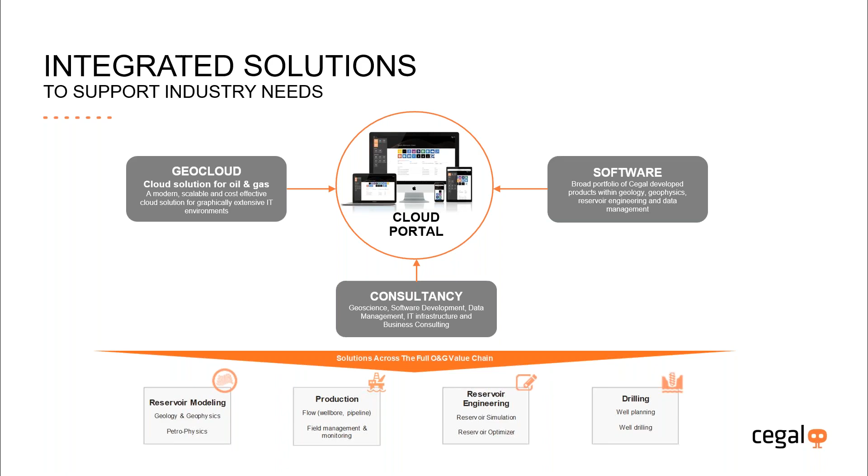And now we're going to have a closer look at one of those plugins, the Unconventional Toolbox for Petrel. This toolbox is the newest addition to our toolbox suite. It was released September last year, and as with our classical toolboxes, the tools in this Unconventional Toolbox are based on client requests. It has small to medium-sized tools that will enhance your existing Petrel workflows. The main focus of this toolbox is to provide improved ergonomics when working with lots of wells.

The Unconventional Toolbox has 10 tools. The Well Data Viewer here is by far the most significant tool in this toolbox, and that is also the tool that I will be demonstrating live in a few minutes. And now I'll give a short one-slide introduction to all of these tools in this list before we move on to the live demo.

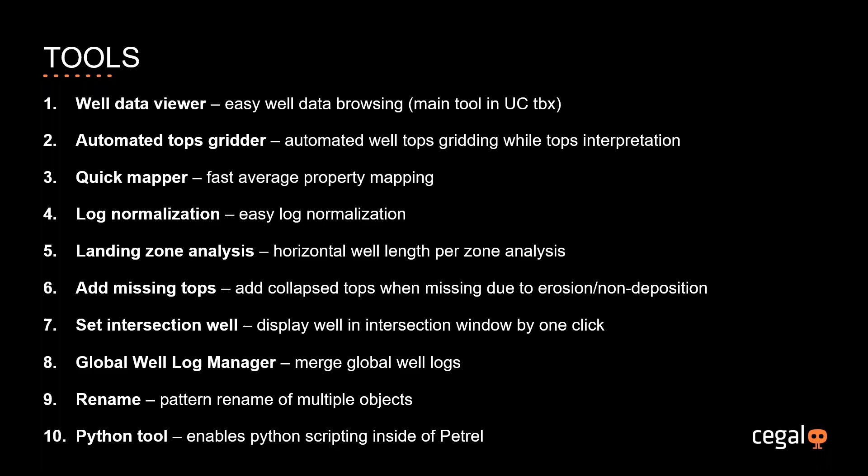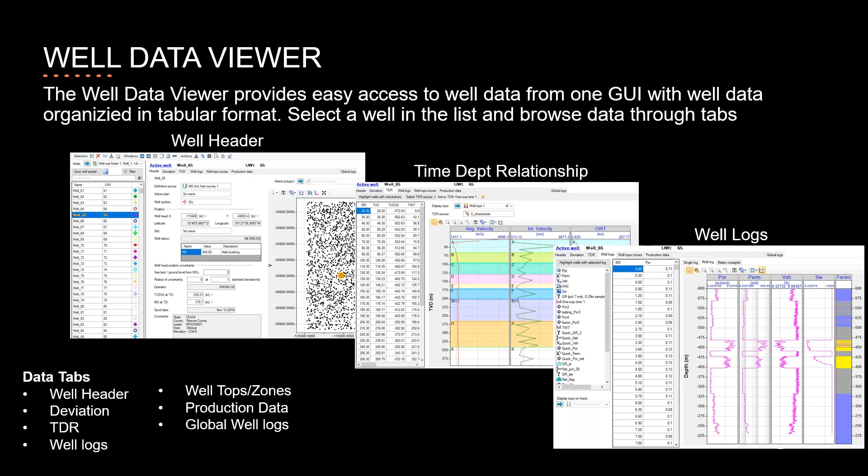The Well Data Viewer is a tool that gives you access to well data from one common user interface. The well data is organized in data tabs in this user interface, and the tabs we have in this first version are well data, well header data, deviation data, time depth relationship data, well log, well tops, production data, and global well logs. And in future releases, you will be seeing additional data tabs in this user interface. This tool is useful in any situation where you have many wells, that being conventional or unconventional.

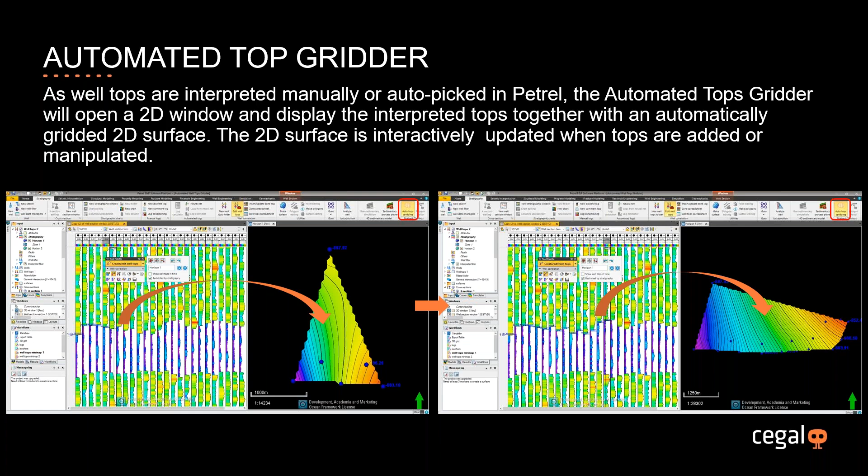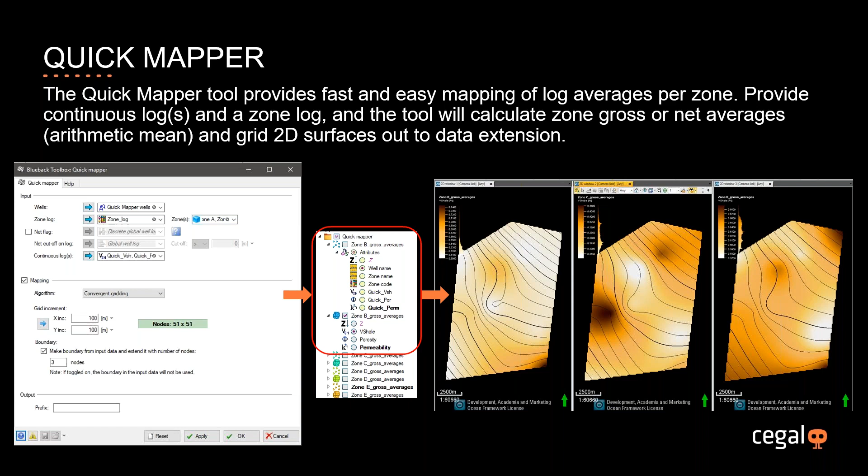The Automated Tops Gridder is a tool that interactively grids a 2D surface of well tops as you pick the well tops in the well section window, providing instant QC and structural information about the horizon that you're picking. The Quick Mapper is a tool that quickly calculates log averages per zone and populates those averages out in 2D maps, providing fast lateral trend screening of properties.

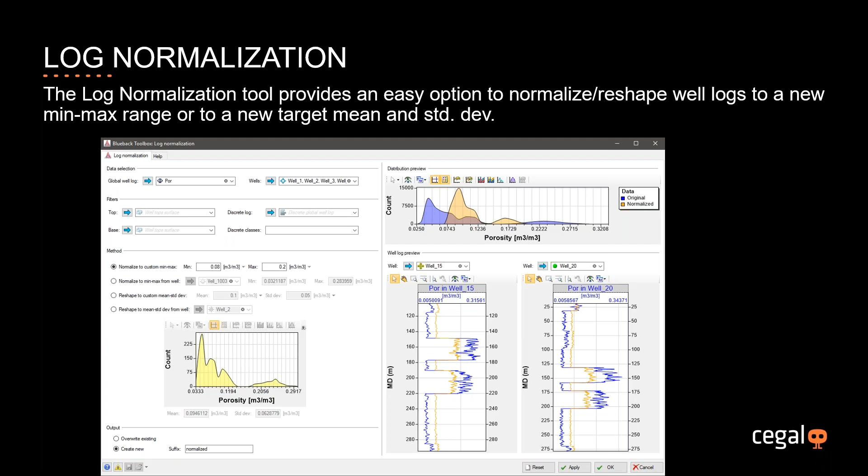The log normalization is a tool that enables easy normalization of well logs, either with custom min and max ranges or ranges defined by known well input. The tool has various before and after QC plots. With the landing zone analysis tool, you can do analysis of zone penetration length per well per operator, and you can go in and see how well you or your competitors are at drilling horizontal wells in the target zone.

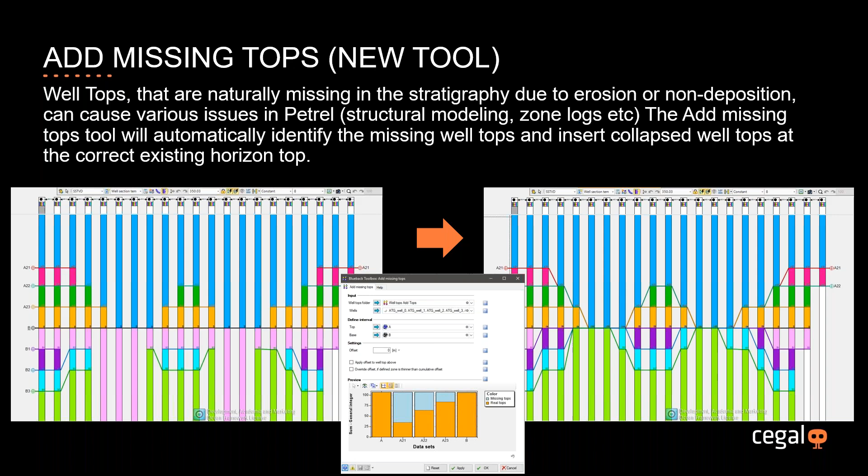When you have geology with erosion or non-deposition, you will have wells in Petrel where certain well tops are missing in the stratigraphic column. In Petrel, it is useful to have those missing tops present as collapsed tops, and the Add Missing Tops tool automatically adds these missing tops as collapsed tops.

Set Intersection Well is a small tool that enables you to select the well for display in an intersection window by simply clicking on the specific well in a Petrel 2D or 3D window.

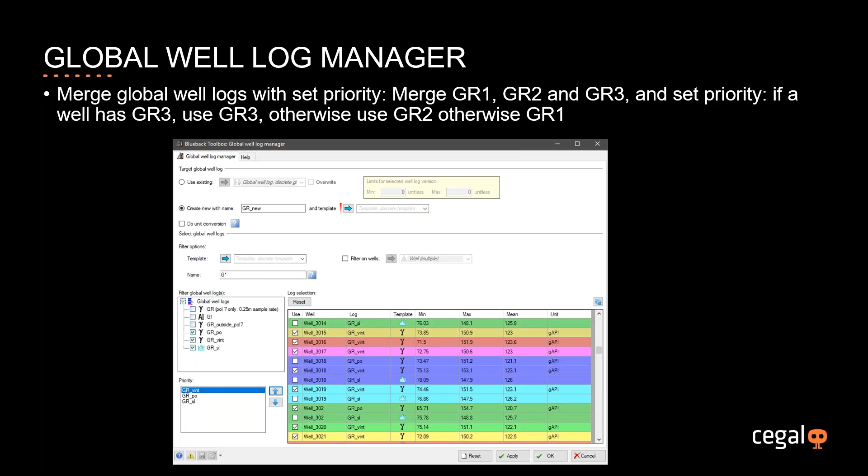The Global Well Log Manager enables you to merge a set of Petrel global well logs into a new common global well log. This tool works across Petrel templates and will generate a new global well log object in the input window.

The Rename tool enables automatic renaming of several objects in Petrel at the same time. It also has name pattern recognition and easy renaming of these name patterns.

And finally, all our toolboxes come with a Python tool that allows you to run advanced Python scripting inside of Petrel.

And now it is time for a demo of the well data viewer. So I will go to Petrel.

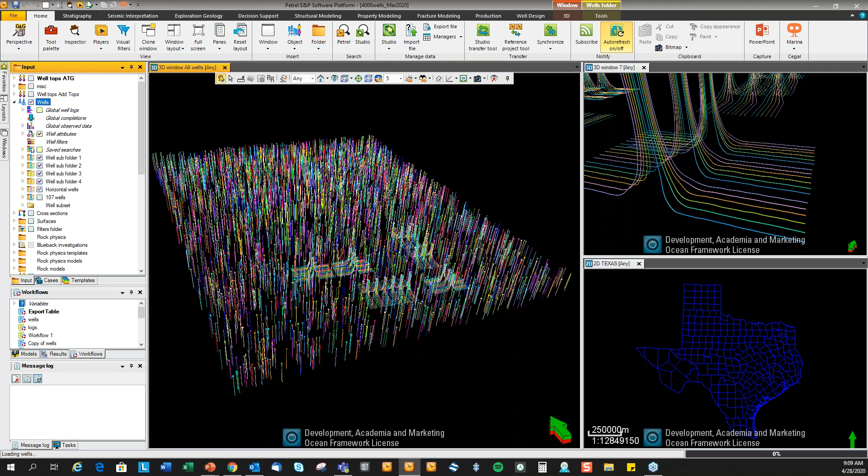Here you see a project with more than 4,000 wells. To open the well data viewer, I go to the wells folder in Petrel, right click and scroll all the way down and click well data viewer. And now the well data viewer is opening for all the more than 4,000 wells in this project.

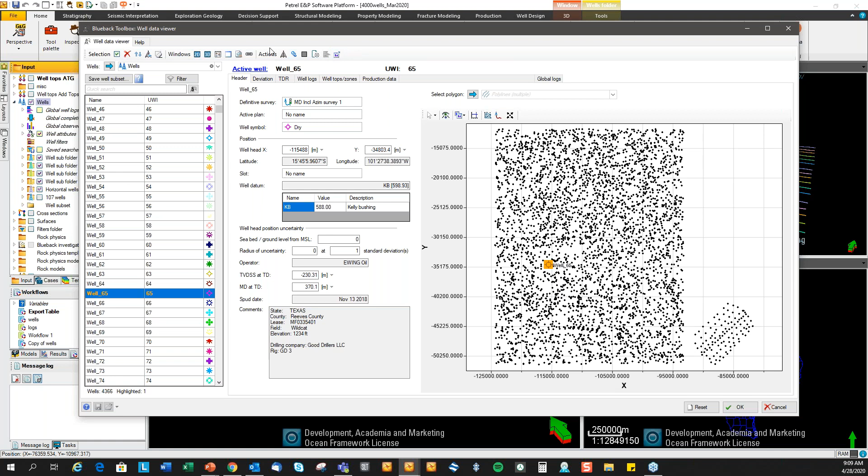So here you see the user interface of the well data viewer. Just make it a little bigger, so just all the main items. We have the well list with all the wells in the project, we have the active well label, so we can go in and activate wells, and we're looking at data for that active well. We've got the different data tabs, and for each data tab we have a data viewing area like this, and here on top we have a toolbar with various tools that helps us with well data.

Okay, so let's go over the individual elements. So the well list, as I said, you have in this case all the wells in the project. At the bottom here you have a little summary. We have 4,366 wells in this project.

One of them is highlighted. We have several highlighting mechanisms where you can highlight wells manually like this. Let's see, now we have 8 wells highlighted, and in some of the different tabs we have some automated highlighting mechanisms based on well data content.

You see we have columns: well name, UWI, symbol, and color, and we can sort on all those 4 parameters in the well list.

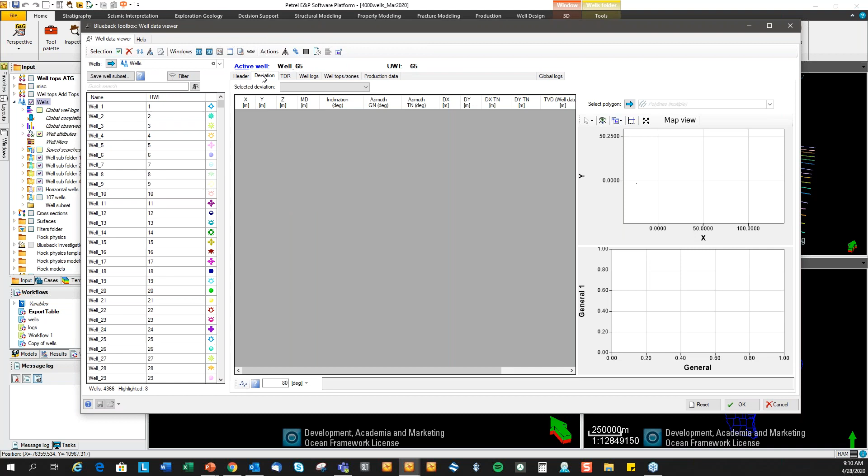The data tabs. So you see that for the active well, we have very easy access to the different data types and the different data tabs for the active well. It is very easy to go in, just one click and you have access to that specific data.

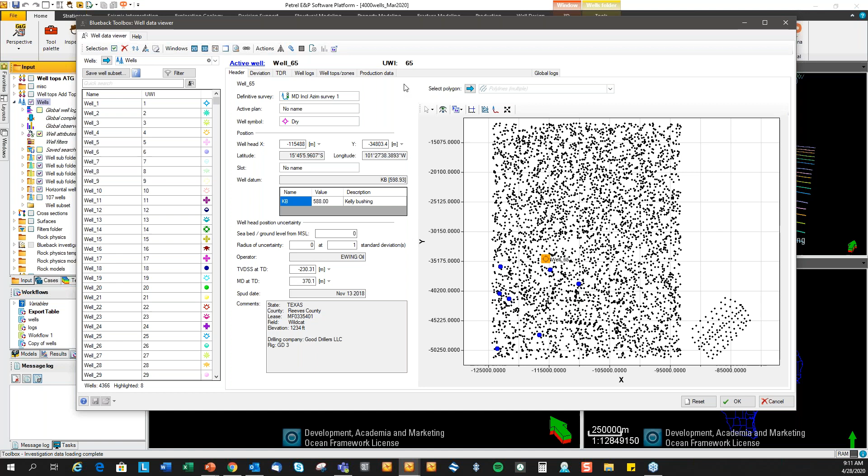So now we'll go over each tab individually. The well header tab, you probably recognize this section here. That is extracted directly from the Petrel well settings, and we have a shortcut to the settings for the active well. So the active well in this case is well 65. I can open up the Petrel settings for this active well by this shortcut, and you recognize exactly this piece of information that we've extracted over into the well header data tab.

In addition to that, we've extracted some well attributes. So we have the operator, total depth, spud date, and we've also extracted the comments section of this well.

Over here to the right, we've added a base map with all the locations of all the wells in the well list, and you can see that the active well is highlighted here in orange. So if I just select different active wells, you can see that orange dot moves around. And you probably also saw that when we do highlighting manually here, these highlighted wells in the well list are also highlighted in the map.

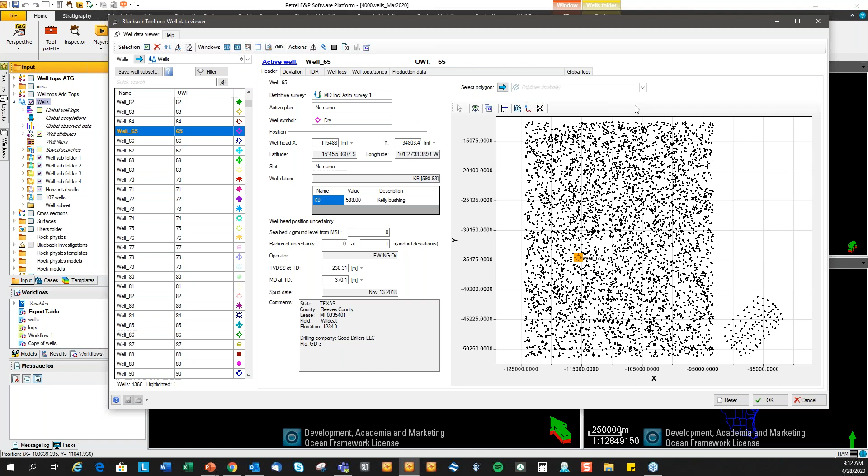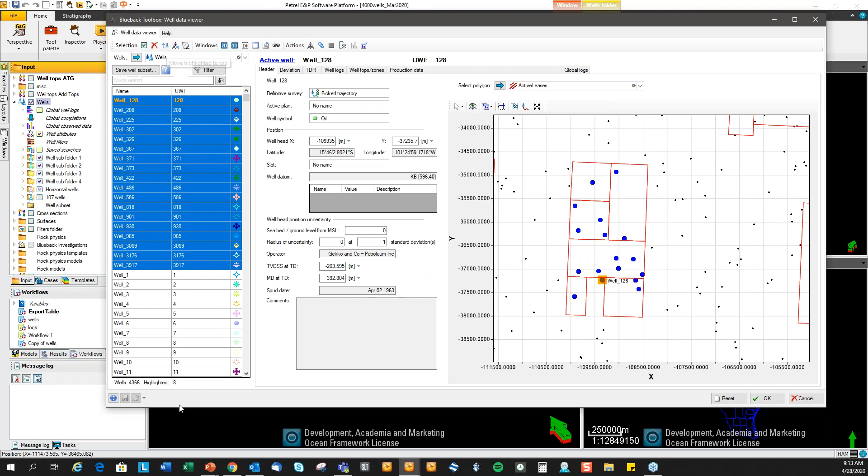We can also go the other way, from the map to the well list. So let me display some polygons, active leases, zoom in on an active lease here. And I want to know what wells I have in this lease, in this polygon. So I use this polygon filter. We have now these wells active, 18 wells are highlighted, and those wells are also highlighted in the well list. So you see they're distributed all over the well list. So I can click this button here that will bring all of those 18 highlighted wells to the top of my list.

So let's just go back to well 65, which is my demo well. The next tab, deviation data. I will, for demo purposes, find a horizontal well.

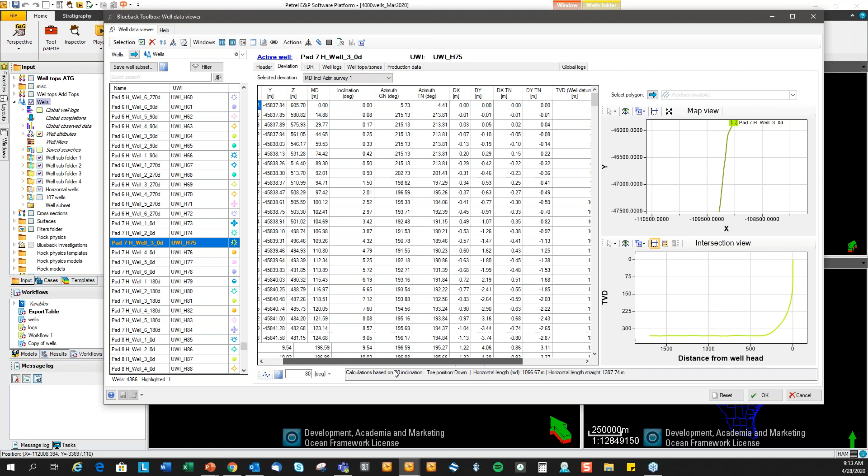Here you go. So in the deviation data tab, we've extracted the deviation survey, so you have easy access to that. In addition, we have a base map of the well trajectory and an intersection window of the trajectory. You can see those.

The trajectories and the surveys update as I flip through these wells. If the well has more than one active survey, you can go in. This one doesn't, maybe this one does. You can go in, you see this one has two different surveys. You can go in and explore those as well.

The tool will display the active deviation as default in this tab. Here at the bottom, if the well has inclination higher than whatever we specify as the heel inclination, the tool will calculate the horizontal length from the heel to the toe. And this heel inclination is editable—you can go in and define that yourself.

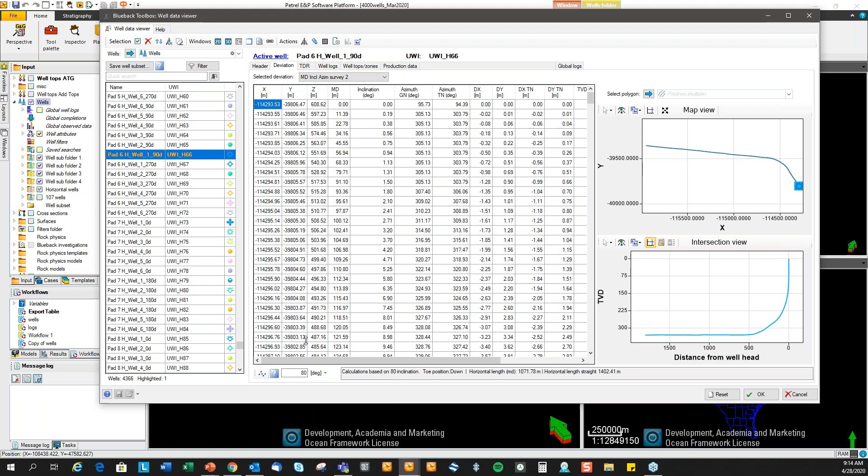Next tab, time depth relationship tab. This well does not have any TDR information, so we can do one thing here: go in and highlight all the wells with check shots. This is one of the automatic highlighting mechanisms.

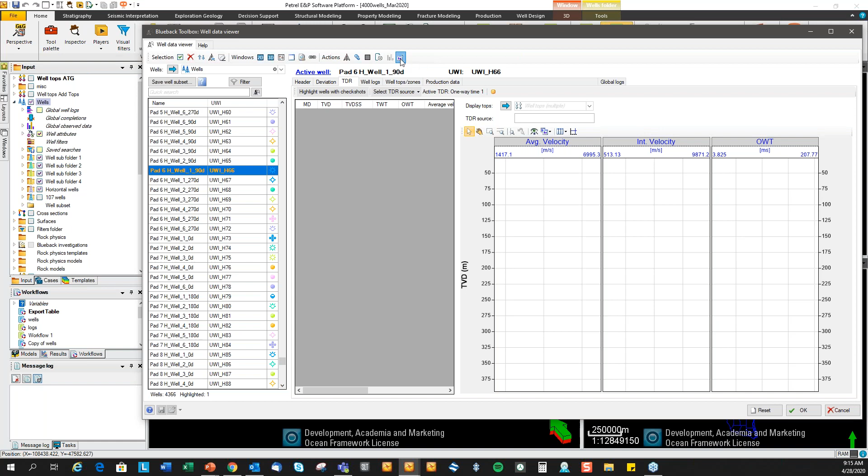And you saw we had the base map sitting in the header tab. This base map is useful in all the tabs, so I can hit this button here that will pop out that base map from the header tab, so we have access to it in the other tab. It's now a floating window.

When I hit this button here, the tool will find all the wells that have check shots and highlight those in my well list. You also see all those wells—those 662 wells that have check shot data—have been highlighted in the base map. So let me just close that base map again.

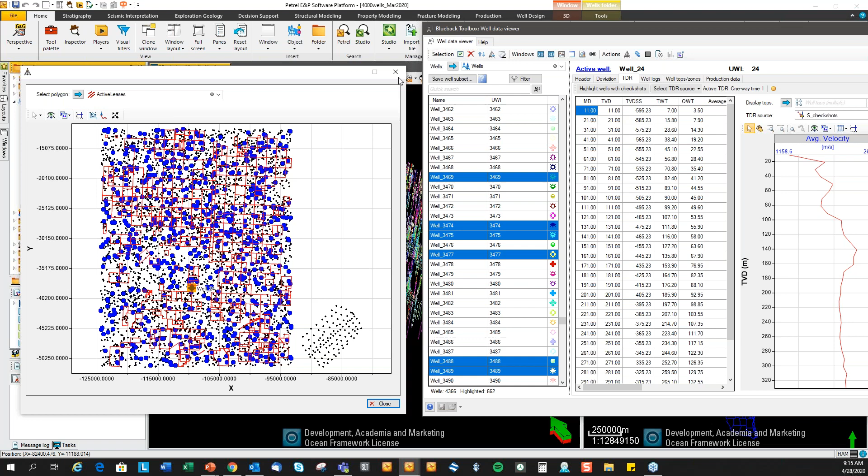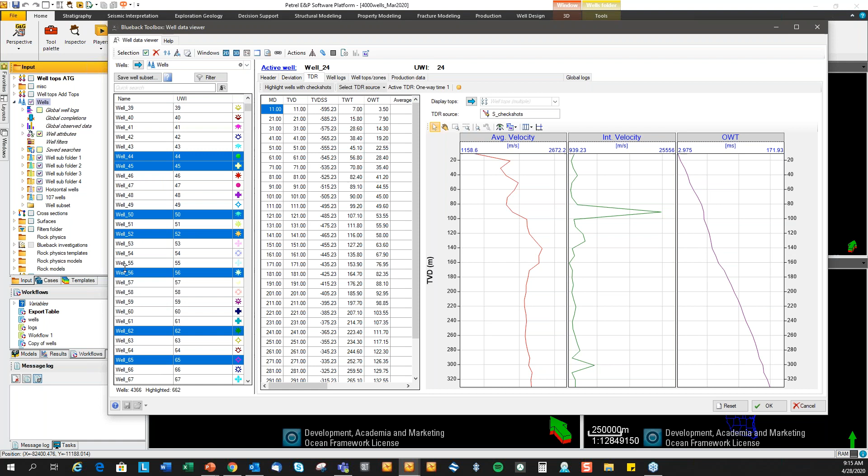So back for demo purposes, I'll go to my well 65. Here we go. So what this tab is doing is identifying the active one-way time log.

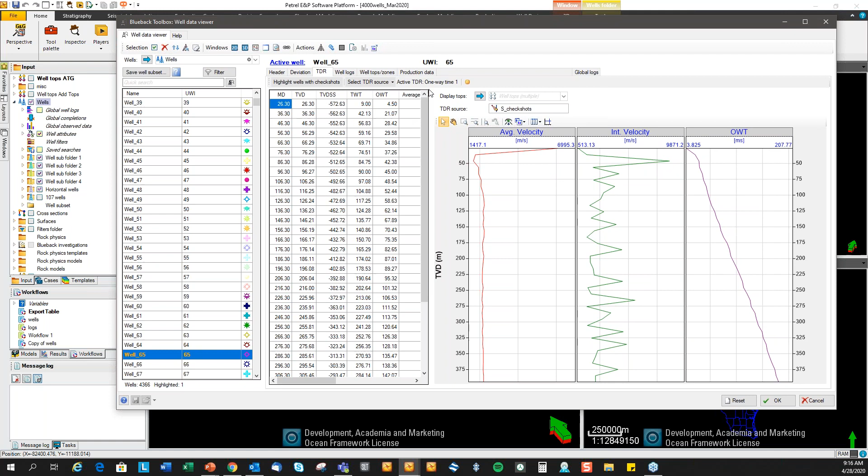That has been generated when you specified the time depth relationship in the Petrel well folders. So when you run that, it generates an active one-way time log that is being used as the time depth relationship. The tool identifies that one-way time log, goes into the history of it, and identifies the time depth relationship source. In this case, for this well, it is a checkshot data set.

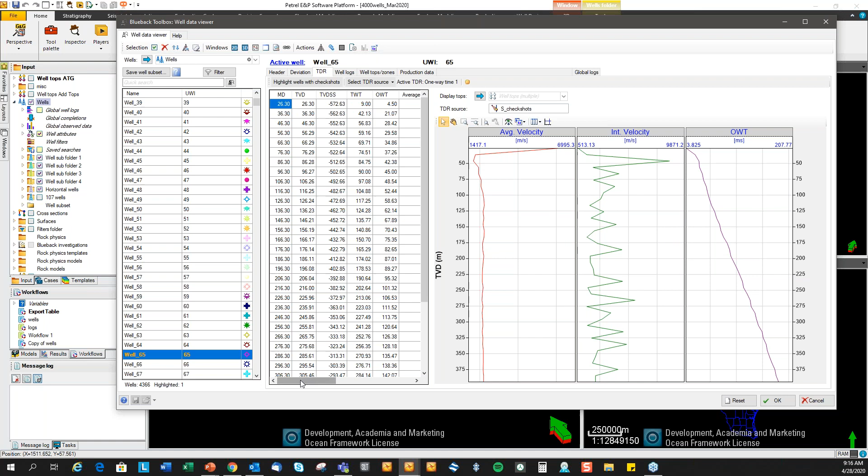So for that TDR source, we extract the checkshot spreadsheet with the depth, the times, and the velocities. And we're giving you the average velocity, interval velocity, and one-way time tracks. We can display well tops on those tracks if we want to, like this.

If the well or any other well has other time depth relationship sources, we can go in and explore those as well. So this well has well tops with associated two-way times. For that, we extract those depths and times, and we actually calculate the average velocity and the interval velocity in the same way as Petrel calculates it for check shots.

And we are able to give you the average velocity, interval velocity, and one-way time traces for this kind of data as well. And the same goes for a two-way time log—we have the times and the depths, and we calculate the velocities for you as well.

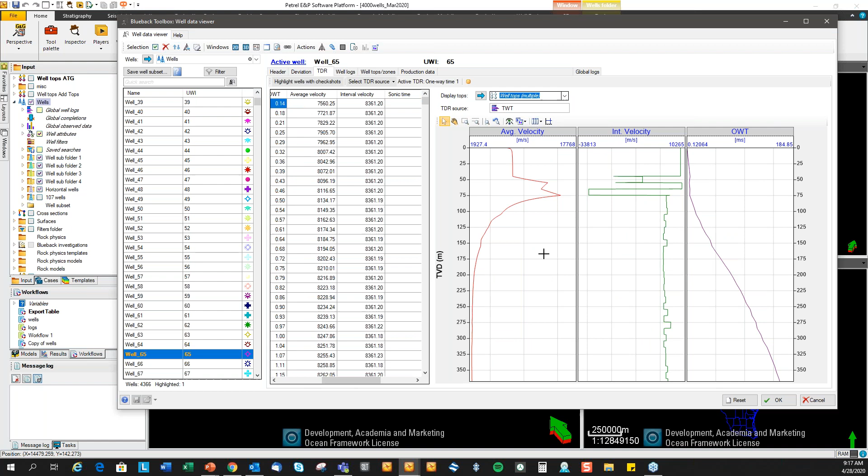Next tab is the well logs tab. In the well logs tab, you see we have three sub tabs: single log, multi-log, and matrix crossplot. In the single log tab, we get a list of all the logs present in this well. We can go in and explore each of these logs, select them, and get the log track displayed over here. We can again display well tops if we want to.

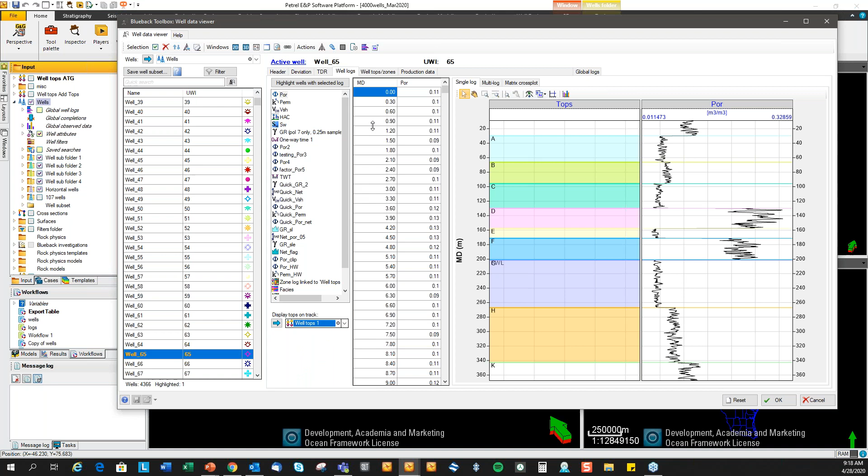And we also get the log spreadsheet with the measure depth and the values, so you can go in and do a quick exploration of these logs.

You can also go in, so for example, for this log quick perm, I want to know all the wells that has this specific log. So we have the selected log. I will highlight wells with the selected log, and that is 401 wells in this project that has this log present.

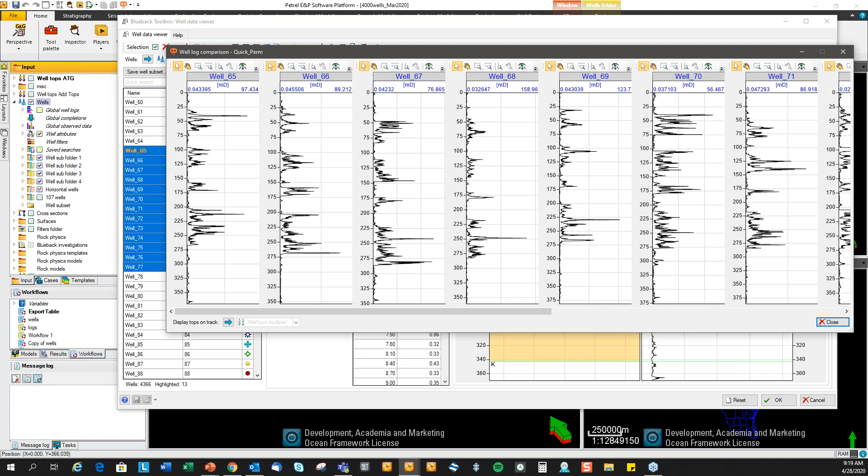When we have this situation, we can also go in and do some simple well-to-well comparison of that selected log. I can highlight a few of the wells that has that log and click this compare wells button. That gives me a simple well log panel with the wells that I selected and highlighted, and the log that I selected. I can go in and do a quick comparison between wells, and I can display well tops on this window as well.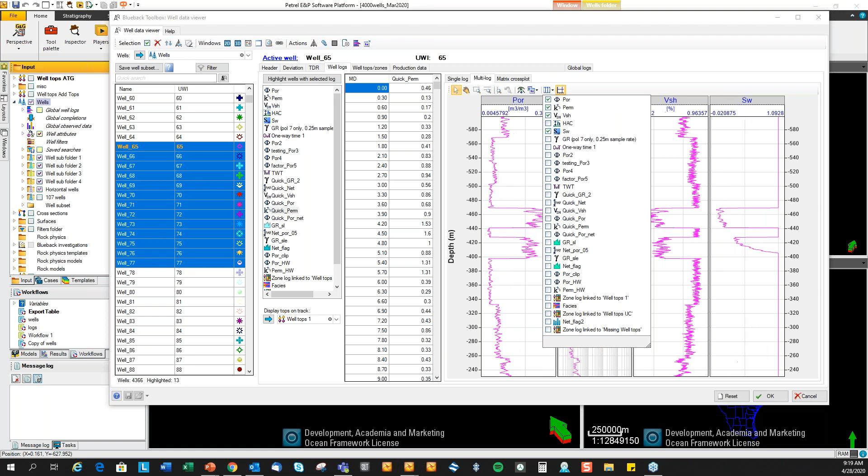In the multi-log tab, you can go in and compare multiple logs from the same well. So in this case, the active well, I can go in here, add some more continuous logs, and also discrete logs like this for comparison and analysis.

And if I toggle on the matrix crossplot, you see that here we generate all the potential or the possible 2D crossplots between the continuous logs that we added to this multi-log tab.

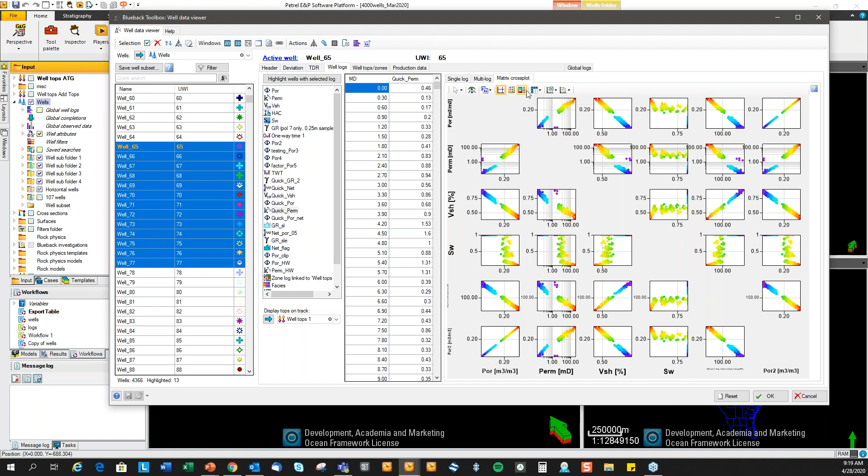We can go in and color by the different log properties that we have in this well. And we can also go in and filter on certain discrete classes in this crossplot as well.

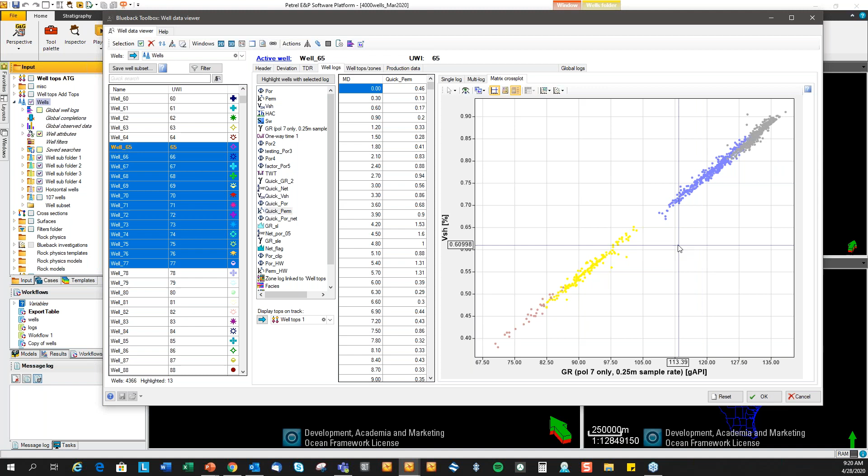If I want to have a closer look at one of the crossplots, like maybe this one is interesting, I can double click and the tool magnifies that specific 2D crossplot, and we can go in and look at this crossplot.

Well tops. So in the well tops tab, the tool extracts all the well top sets that are present in this active well. In this case, this well has 3 well top sets or 3 well tops folders: missing well tops, well tops UC, and well tops 1. And you see we've extracted the well top spreadsheet

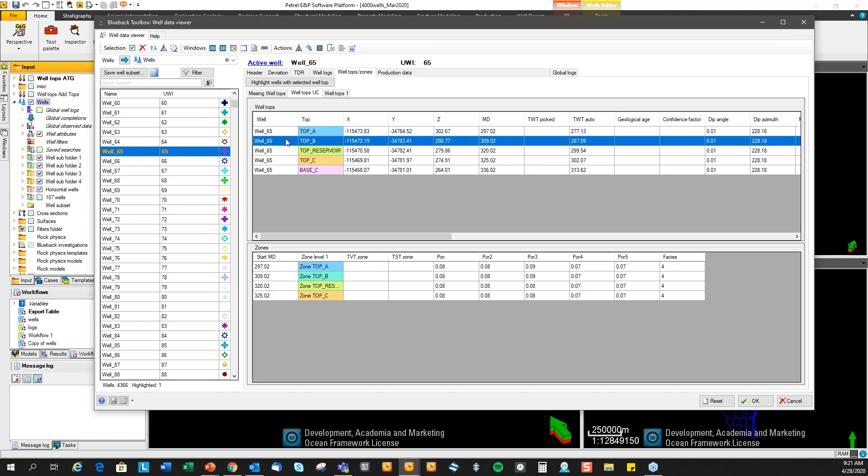and the zone spreadsheet for each of these well top sets. So you get very easy access to this information from the well tops, and you can also go in and do some automatic highlighting. I want to know all the wells that has these two tops present. I can select those tops and hit highlight wells with selected tops, and the tool will identify all the wells that has these two tops present. That in this case is 1,434 wells.

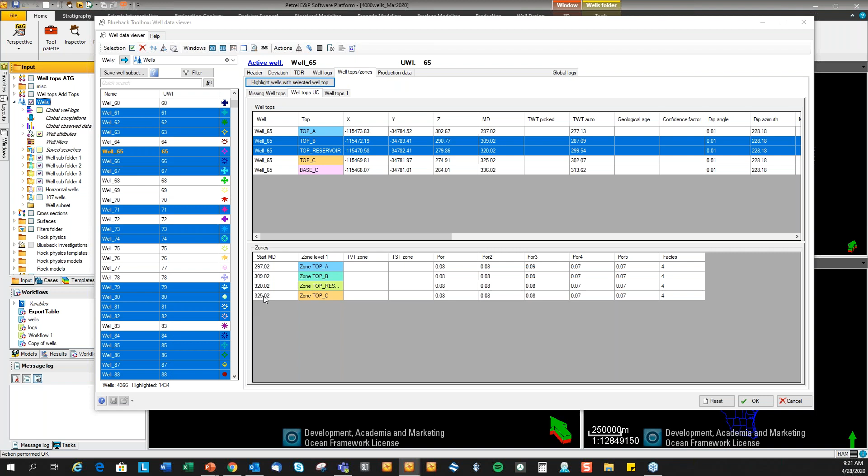Production data. So in the production data tab, we identify all the wells that has an observed data set. So we can go in and highlight wells with production. In this case, that is 17 wells in this project. We can bring them to the top of my list again.

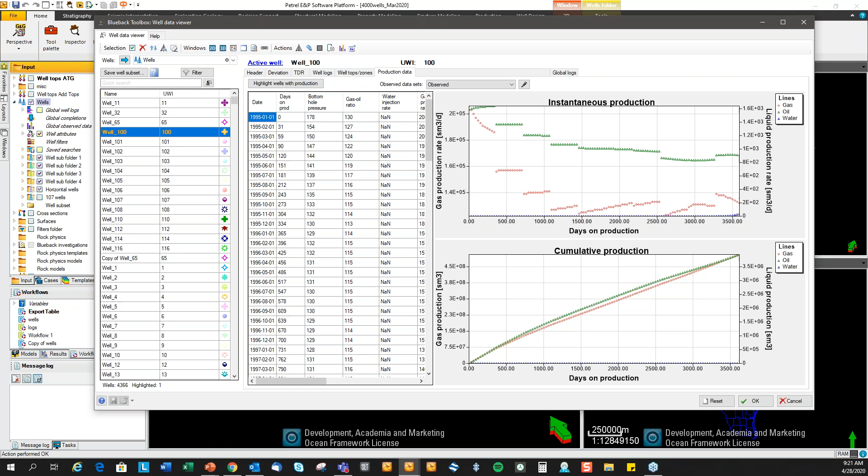Select well 100. And as I said, we are in this version looking at observed data sets. We extract all the production information in the table in the observed data set spreadsheet. From the spreadsheet, we are extracting gas, oil, and water daily production and list that in this plot here. And also we add it up and have the cumulative production for the active well.

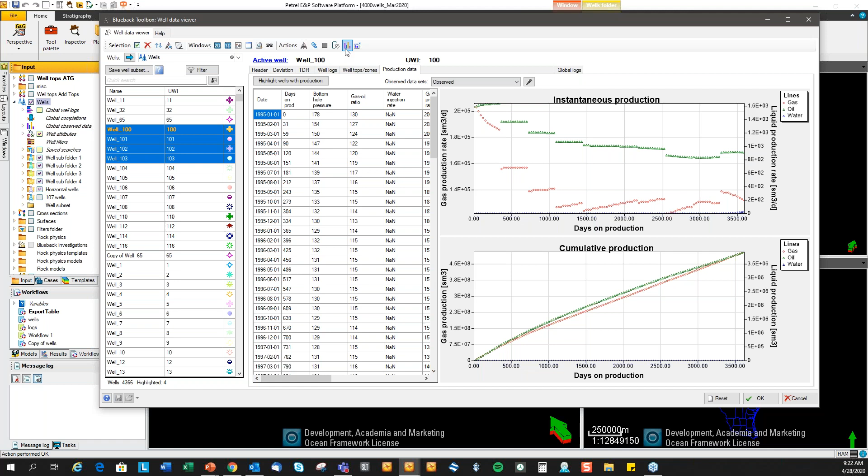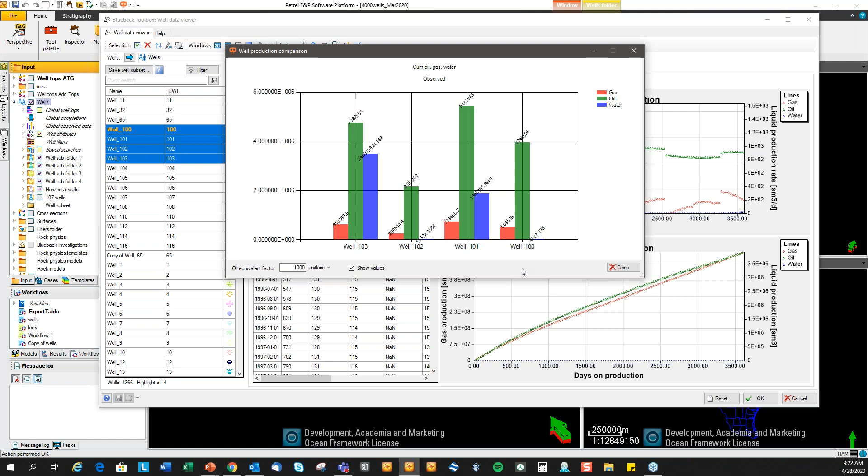And again, we can do some simple well-to-well comparison. I can go in and highlight several wells that I know has this observed data set and click the compare wells button, which gives me this block diagram. I need to put in an oil equivalent factor, show values. And here you have the cumulative production, gas, oil, and water for these 4 wells in block diagrams for quick comparison.

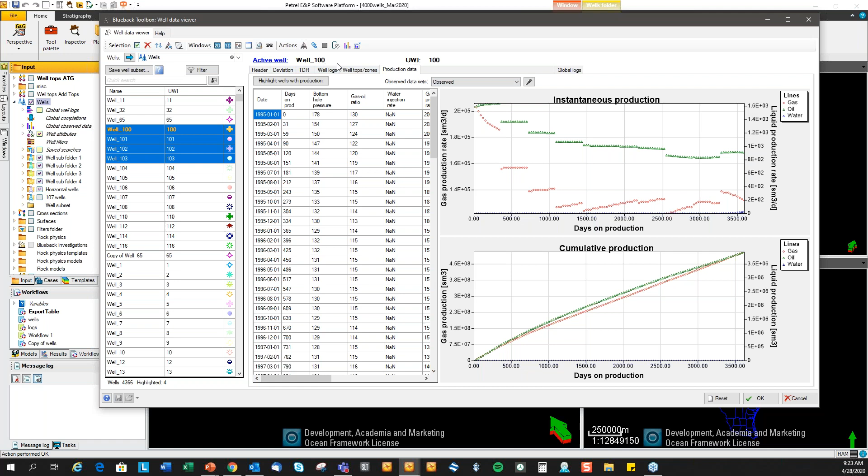The last tab, the global logs tab, you see that sits by itself over here to the right because the data viewing approach is different than the tabs that we went over already. These tabs look at data only for the active well, whereas the global well logs tab looks at all the global well logs in your Petrel project. So here you see it's doing a well count per global well log.

We have different columns. We have the global well log name. You can sort on the global well log name. We have template, and we can sort on that, and that's very nice. So you get all your different properties lined up. We have units, min, max, delta, and well count. And you can also sort on those columns. So here we have the well count, and we've sorted on the well count. That gives you the number of wells per global well log.

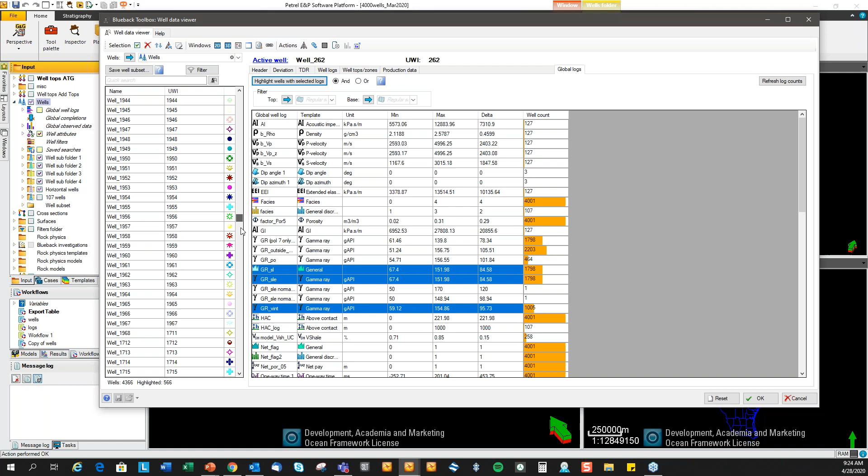And here we can do some more sophisticated well highlighting based on log content. So for example, if I want to know all the wells that have a certain log suite, for example, gamma ray SL, gamma ray SLE, and gamma ray Vint, I can go in, select those log templates, and highlight all the wells that have all of these 3 logs present. That is 566 wells in my project. So all of these 566 wells have all of these 3 logs present.

I can also go in and do an OR, highlight all the wells that have any of these 3 logs. So 2,237 wells have either one of these logs. We've also added a depth interval filter. So if I want to know a certain log suite, for example, I want to see the wells that have VP and VS, highlight those wells. That is 127 wells, but I also want to know, are these logs that I'm interested in present in my reservoir interval, for example?

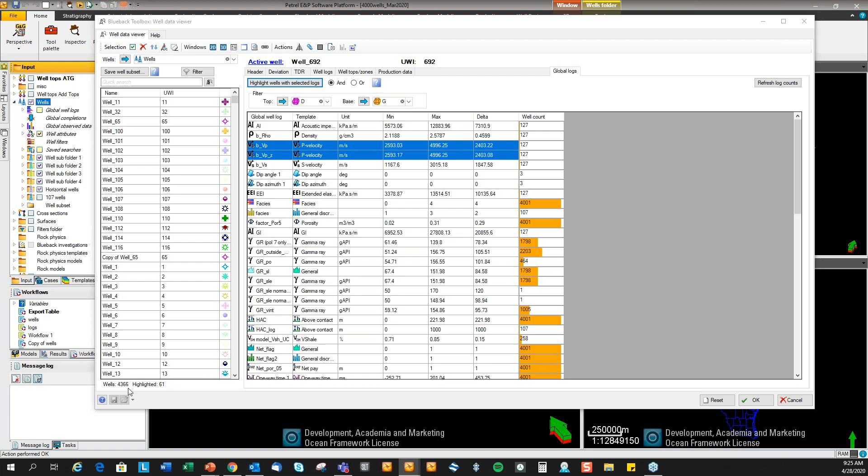So I can go in and use this depth interval filter based on 2D surfaces. I want to know if these logs are present in this specific interval, and run this highlight wells again. And now you see that the number of wells with these logs present in this interval dropped to 61 wells.

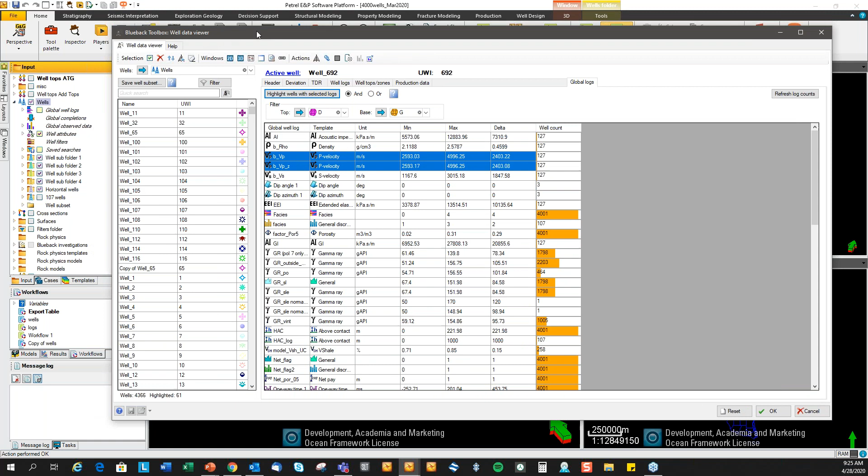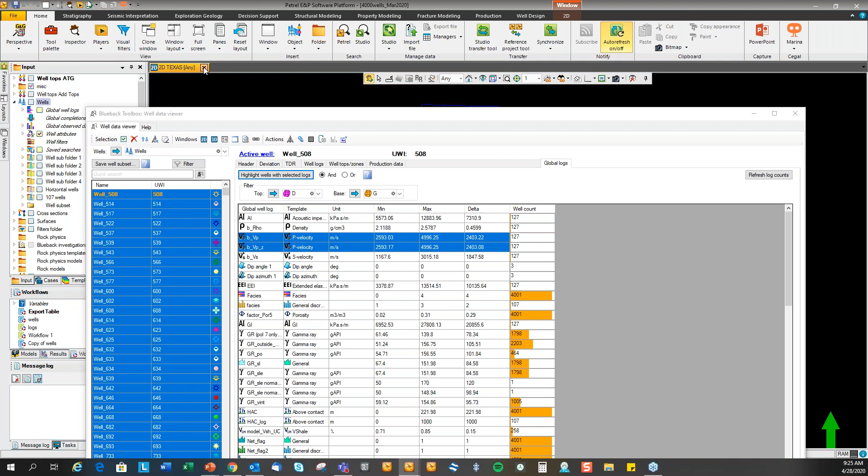So let's just have a quick look at some of the tools that we have in this toolbar. Let me bring all these 61 wells to the top of my list. Let me close these existing windows. So we can broadcast or send these highlighted wells into Petrel windows. We can send them, for example, into a 2D window. So here you see those 61 wells quickly displayed in the 2D window. We can send them to a 3D window like this.

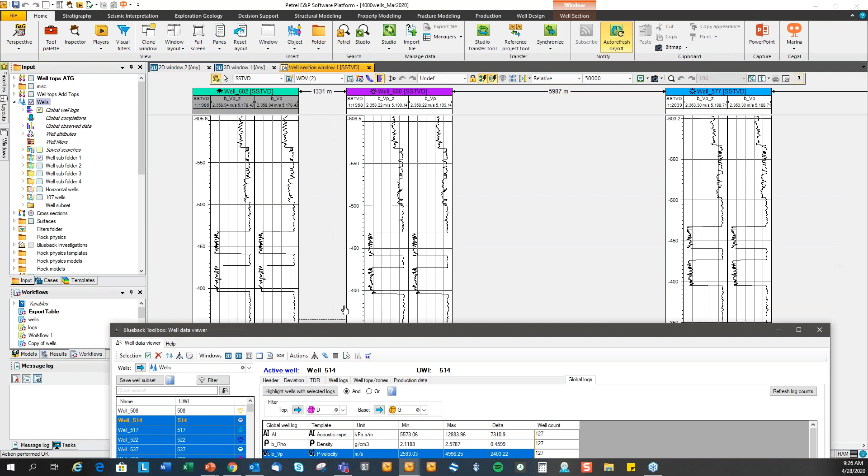I can also send them into a well section window. Let me just reduce the number of wells just for demoing here. So in sending these wells, we'll also be sending the selected logs into the well section window. So here I am sending the highlighted wells and the selected logs into a well section display directly for display.

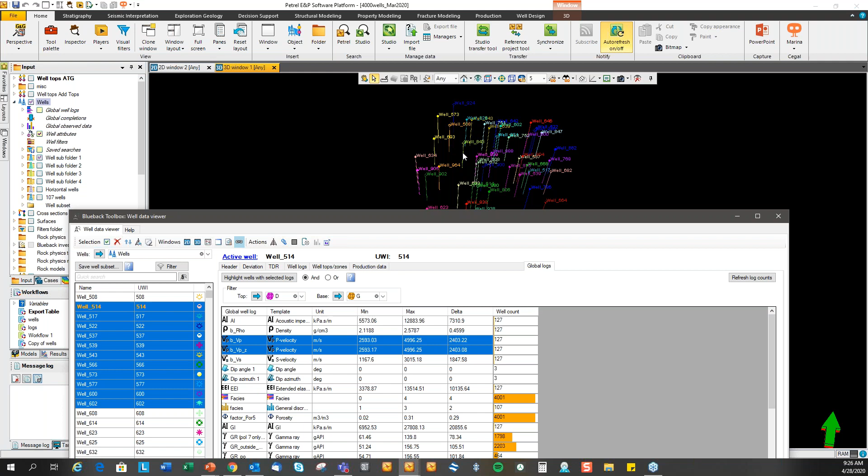So you saw that we can go from the well data viewer to Petrel windows, but we can also go the other way. If we want to set our active well by clicking on a well in a Petrel window, we can go in and toggle this link tab here. And by that, I can then select the active well by clicking on it in a Petrel window. So now we clicked on a well. That well is now active, 843. The well is not present here in the well list, so where is it? We can hit this little shortcut that will scroll the well list so that the active well is on top of the list.

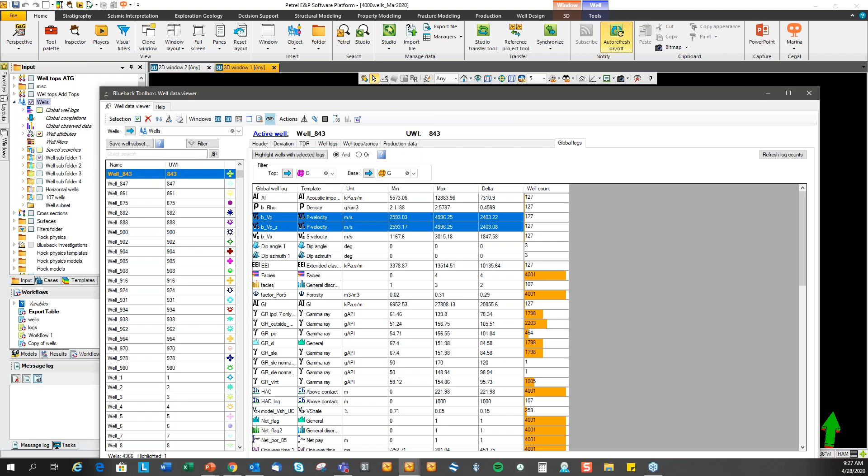And just another example, click on another well here, and we can quickly identify that active well in the global well logs tab.

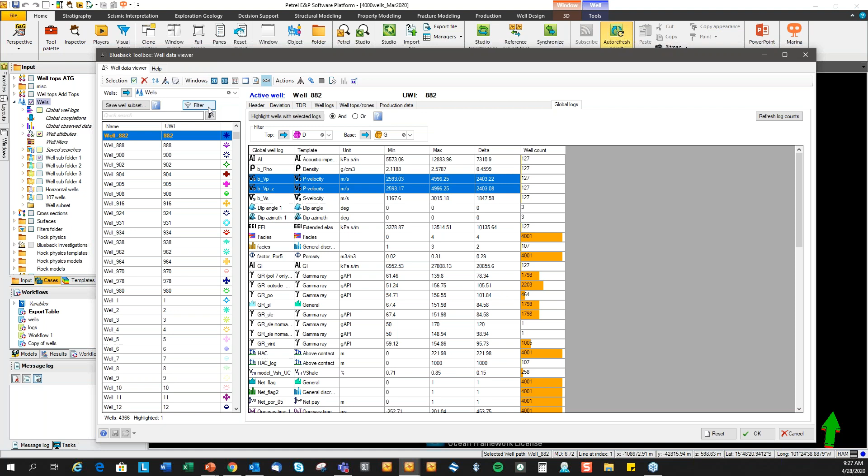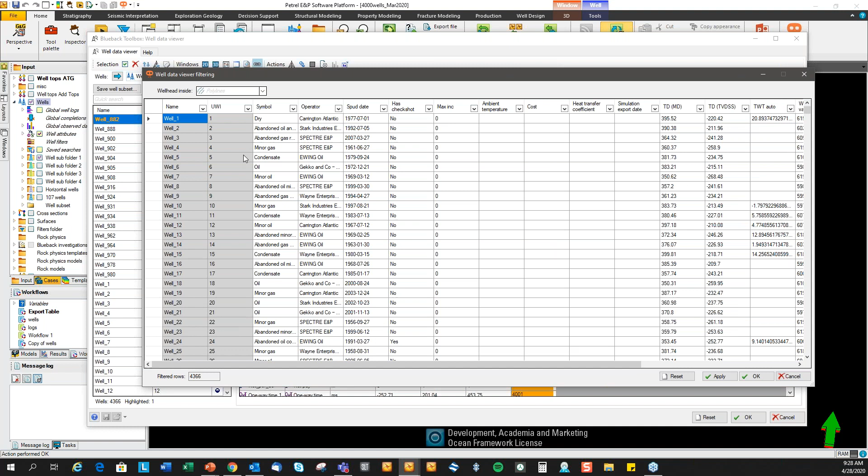Okay, so you saw that in the different tabs, we have these highlighting mechanisms, a relatively simple well filtering operation based on data content. We also have a more sophisticated filtering mechanism, so we can click this filter menu. It takes a few seconds to open. In this filter menu, we have access to filter on all the well attributes that we have in the project, if the well has that specific attribute present. So you see we've got all the attributes: name, UWI, symbol, operator, spud date, and so on. We also added a polygon filter, and we also added the ability to filter on number of points in the deviation survey.

So with this filter here, you can, for example, easily identify all the wells that have quickly been added to your project with 2 points, a well header and a TD, for example. The wells that do not have a real deviation survey. So let's try and go in and make a simple filter.

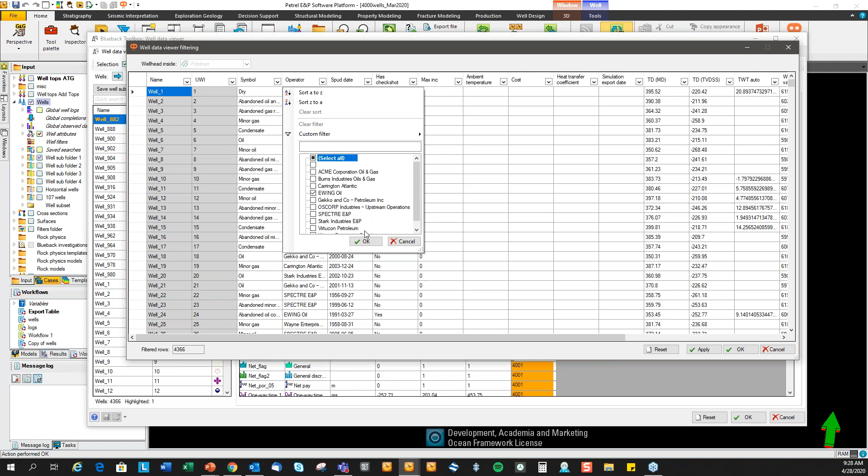I want to see all the horizontal wells for a specific operator. So I go in and filter on operator, deselect all and select Ewing Oil, filter. Ewing Oil has 924 wells in this project. And now I will filter on inclination to identify the horizontal wells.

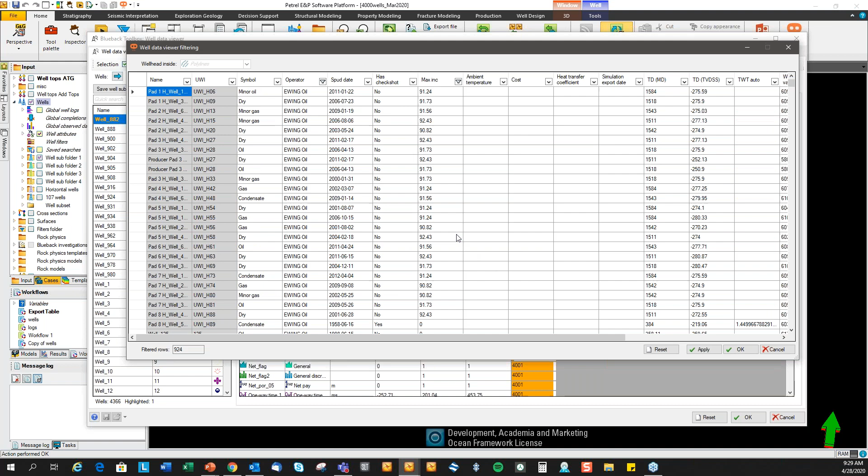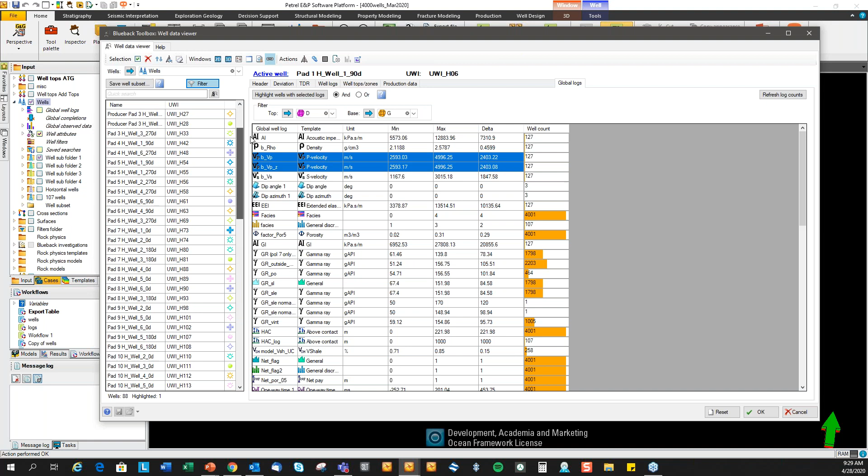So I'll go in and add a filter. I want to see all the wells that have inclination greater than 80 degrees. And now we reduced down to 88 wells. I click OK here. And now my well list in my well data viewer is reduced to those 88 wells, and I can go in and explore those wells easily.

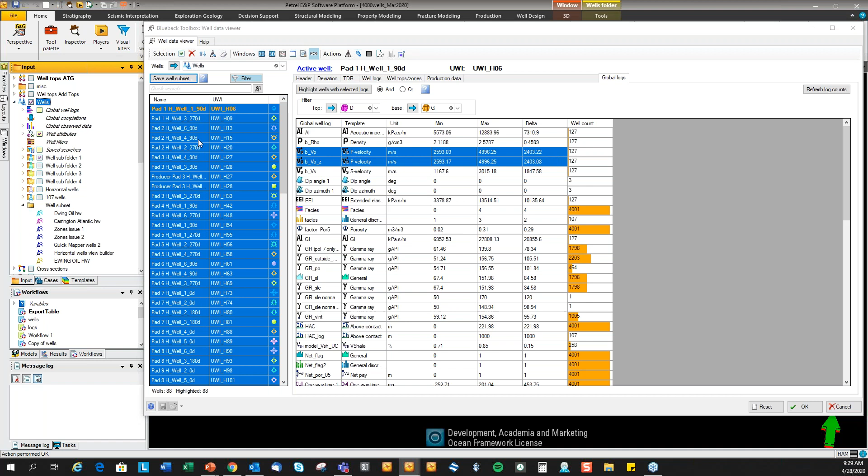We have a save subset mechanism that saves the highlighted well list as a little well subset. So I can go in, highlight all my wells, save this subset. I will call that Ewing Oil horizontal wells. Close. This well subset is saved here in a subfolder in the wells folder in Petrel. Let's just close this window.

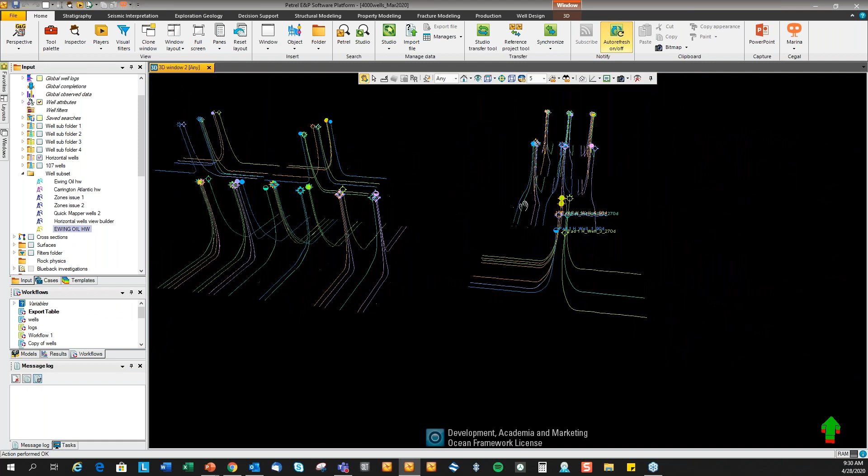So here you see I've had some additional previously made well subsets. I can go in the one we just created, look at the well content in this well subset, and we can do a few simple operations with this well subset. So for example, I can display all the wells easily by right clicking. So now we're displaying the wells in this well subset.

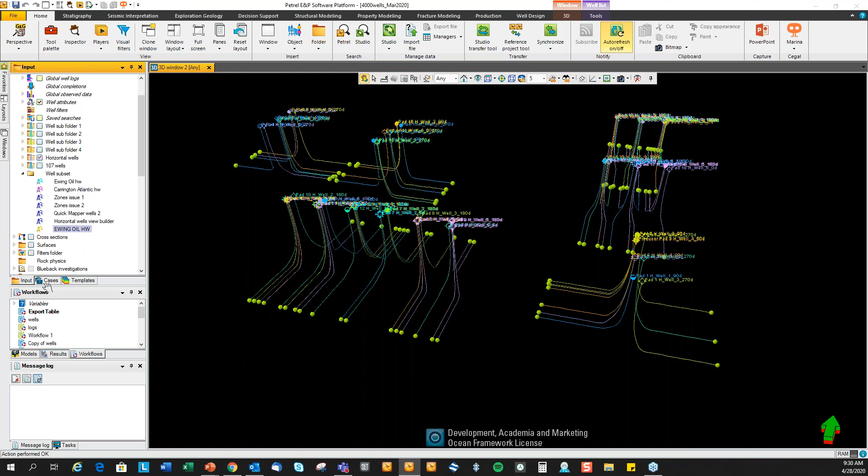I can also generate a point set for these wells in this well subset. So we can generate a Petrel point set at the top or the base of vertical wells and at the heel, the mid, and the toe for horizontal wells. In this case, we'll generate it for the toe. And here you see that we now quickly generated a Petrel point set at the toe of these wells in this well subset.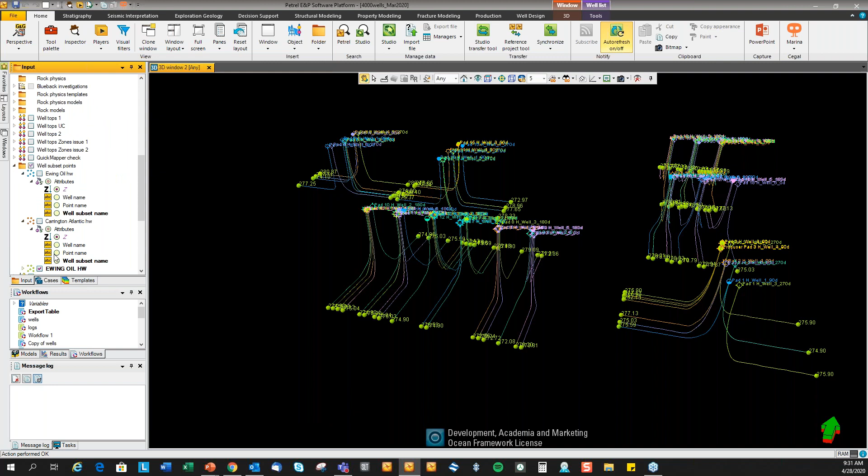It automatically opens the settings for the point set, so I can go in and enable the annotation, and I'll scroll down and find my well subset, and I can change the annotation to the name of the well subset. So that gives you an alternative or additional way of labeling wells in your Petrel windows, for example.

So these well subsets can also be read by some of the other tools in the unconventional toolbox. You access the other tools in the unconventional toolbox here from the menu. Go to the Blueback toolbox. That opens up the toolbox menu, and I'll filter on the unconventional toolbox tools already. Here you see all the other tools that we covered in the PowerPoint.

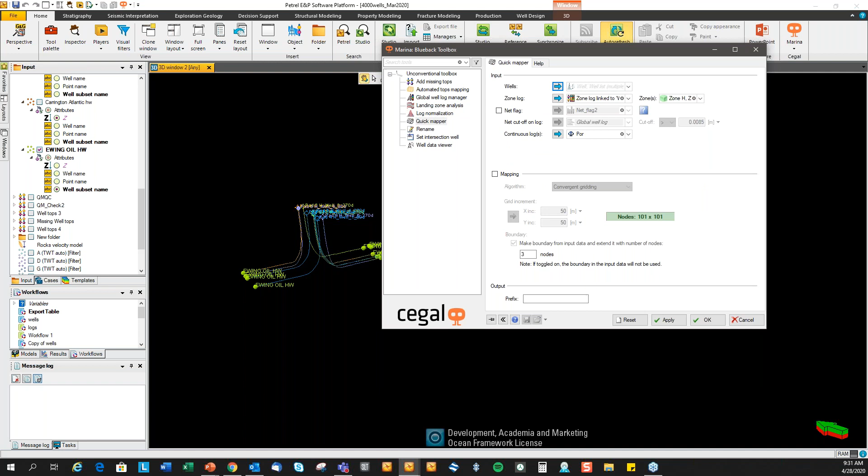And if I, for example, go to Quick Mapper and just delete the wells that I selected already, here in the wells selection box, you can see that we have access to selecting these well subsets. So if you did a well filtering based on certain data content in the well data viewer and saved these well subsets, you can load the right wells very fast into some of the tools in the unconventional toolbox.

So you see that well data browsing in Petrel becomes quite a lot easier with the well data viewer, and making tedious workflows in standard Petrel easier is also what we have tried to do with all the other tools in the unconventional toolbox. Take something that is very mouse intensive in standard Petrel and make it a lot easier to do. That's been the main approach for these tools. So quickly back to the PowerPoint.